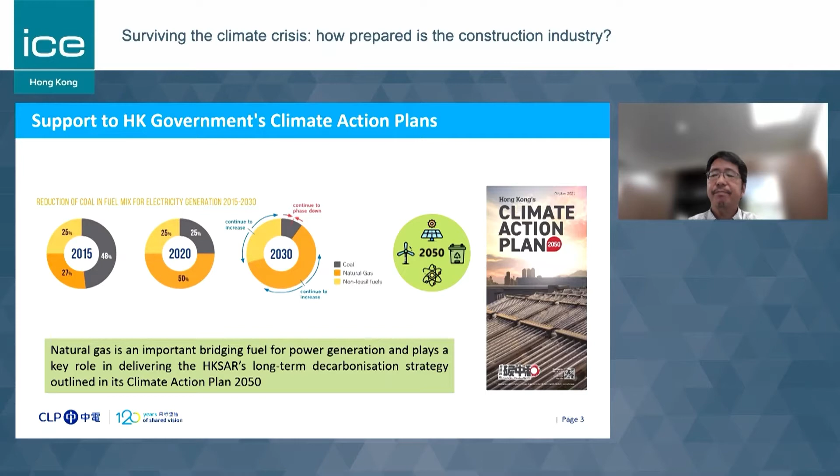If we take a look at how natural gas started being used in Hong Kong, this all started back around 1996 or thereabouts, when we first introduced the really long offshore pipeline from the gas field in Hainan, which is about 800 kilometers away. That was the first ever long-distance pipeline directly supplying natural gas to Hong Kong's CLP power station.

Ten years or so later, there was the introduction of natural gas from Dapeng, Shenzhen, to the Hong Kong Electric facilities. And the last to add to the portfolio was the big initiative from the mainland, the West-East pipeline gas. Probably not a lot of people in Hong Kong know that we actually benefited from this with a branch, taking gas by building a pipeline from DaChan Island to the CLP power plant. So there are currently three sources of natural gas supply to Hong Kong. But we do need to broaden the portfolio if we were to completely replace the use of coal, and this is where our project comes in.

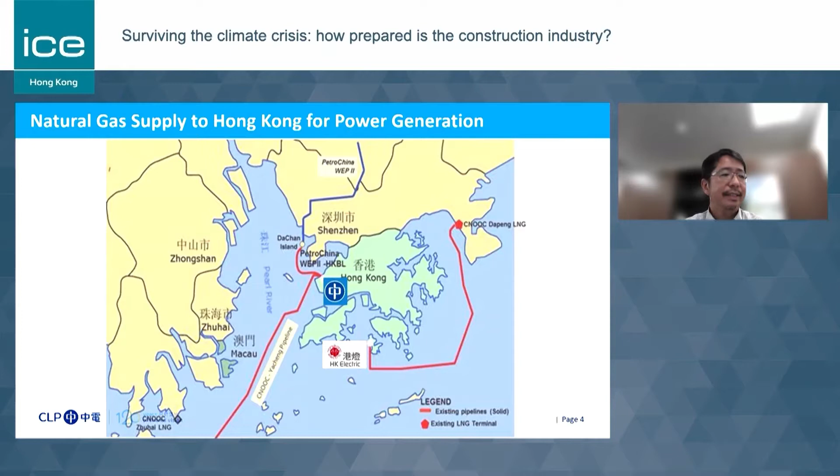So rather than pursue a similar long-distance pipeline, we turned to another form to add to the portfolio: what we call liquefied natural gas. This basically is turning natural gas into liquid form by cooling. The benefit of cooling is that it greatly reduces the volume, making it much more economic to transport over long distances. The liquid itself is colorless, odorless, and non-toxic. Transporting it in a liquid state started back in the late 50s, I think, and ever since there's been a gradual increase in this form of transportation of natural gas.

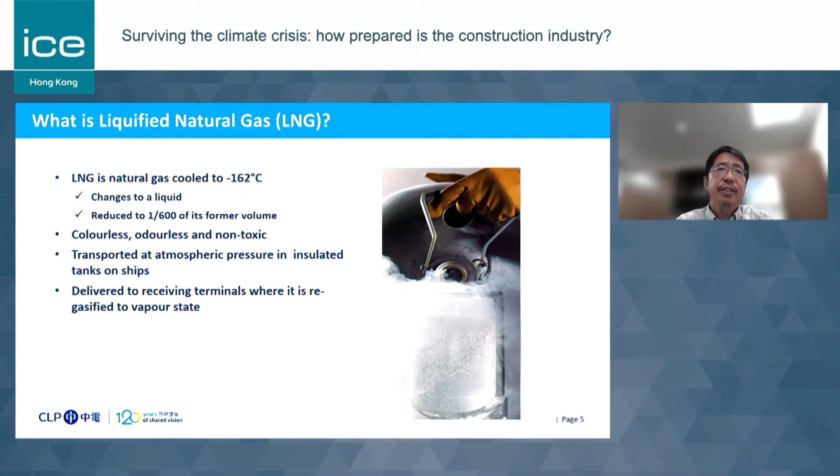In terms of the supply chain, this is quite simple. From the gas field, it gets liquefied and becomes much smaller in volume to transport. These are transported in the LNG carrier to a destination where the liquid form can be transferred into storage locally where the facility is. In our case, this facility is an offshore terminal using a special form of vessel to store the liquefied natural gas before using a local pipeline to transport it to the power station. So it's quite a simple supply chain.

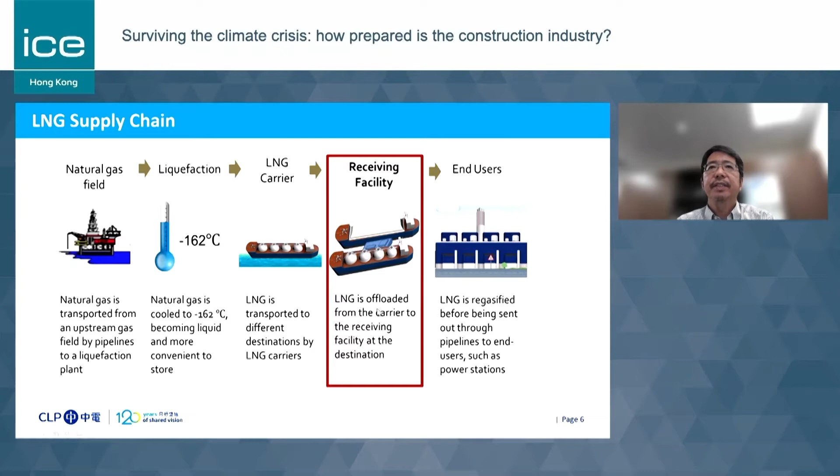And this is the facility that we are currently building in Hong Kong. It is a jetty that allows the LNG carrier to berth on one side, and the storage vessels that we're going to bring in will berth on the other side to store the LNG and let the LNG carrier leave after it is stored.

So there are many long-term benefits from a facility like that. We will be able to access more competitive supply globally, particularly in times when there is volatility in the supply and the prices, and to be able to have more flexibility is very important.

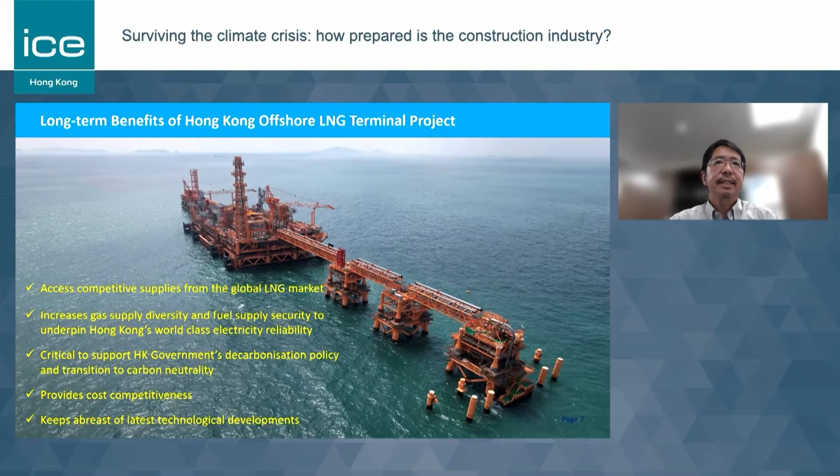And this is going to be a key part in the overall decarbonization plan. At the same time, we will be keeping abreast of technology developments and looking to enhance future greener forms, like Mr. Wong has alluded to, on hydrogen etc. So all this development is part of the journey of where we're trying to get to.

This is the picture of what it's going to be like when the LNG carrier arrives at the jetty, transferring the LNG across to the storage unit. And this is a particular form of storage unit. Unlike many land terminals where you're using purpose-built tanks, this is a vessel with a large storage capacity, storing the LNG and using it as needed.

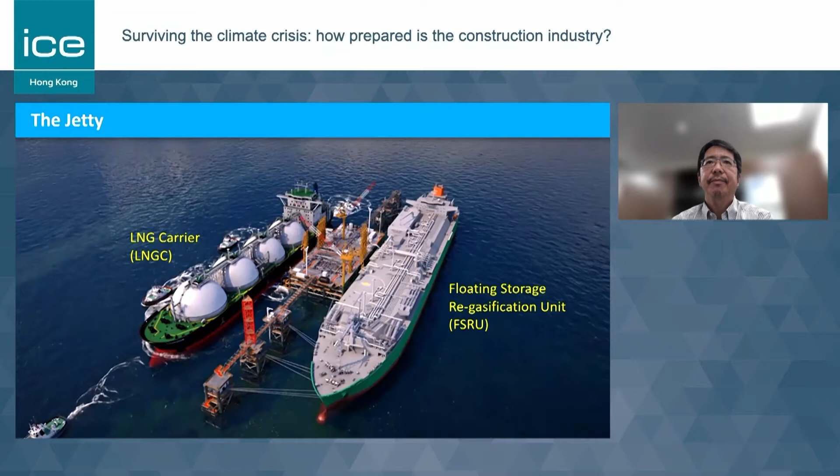So this is what you will see shortly in the offshore environment. This is the vessel that I talked about for storing the LNG locally. It is the exact vessel that we're going to have on a charter arrangement. At the moment it's called the Challenger, but I suspect that the name might be changed to tally more with a local kind of initiative.

The vessel is big. We're talking about an overall length close to 350 meters, which means it's more than the length of 3 full-size football pitches, if you can imagine the kind of size we're talking about. This is important because it means we wouldn't need very frequent visits of the LNG cargo to Hong Kong, making it more manageable.

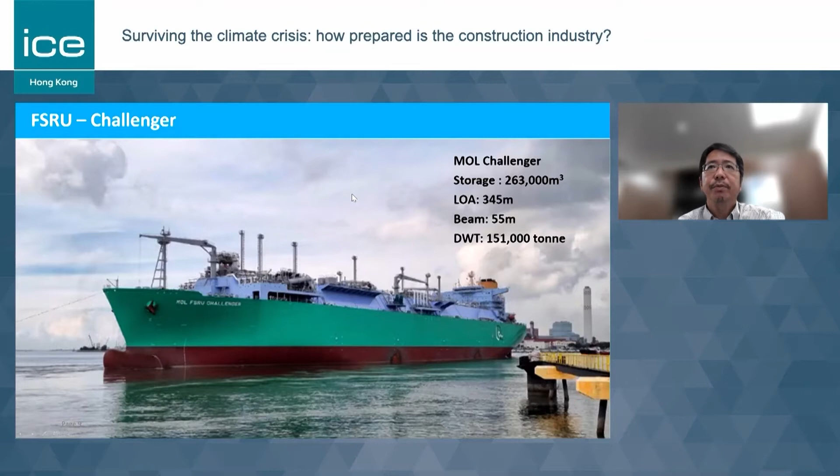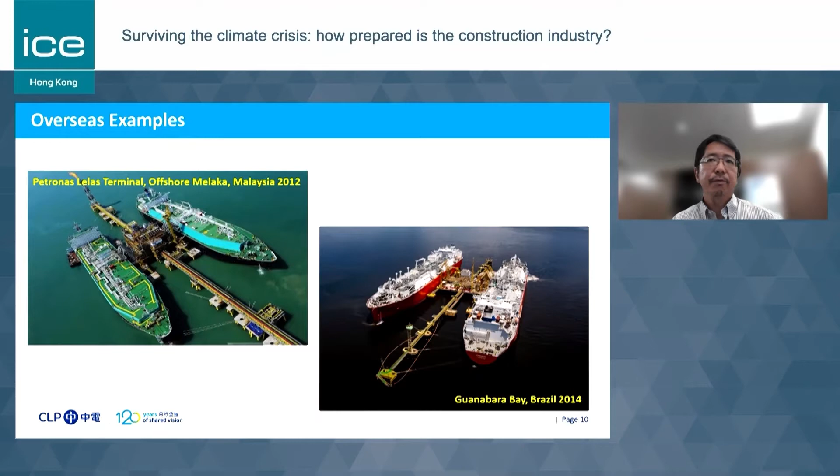Once the LNG is stored, it's transferred to the power stations using two local pipelines. One is about 18 kilometers long, going to Lamma Power Station. The other is much longer, about 45 kilometers, all the way to Black Point Power Station. That's the configuration of the facility we are building.

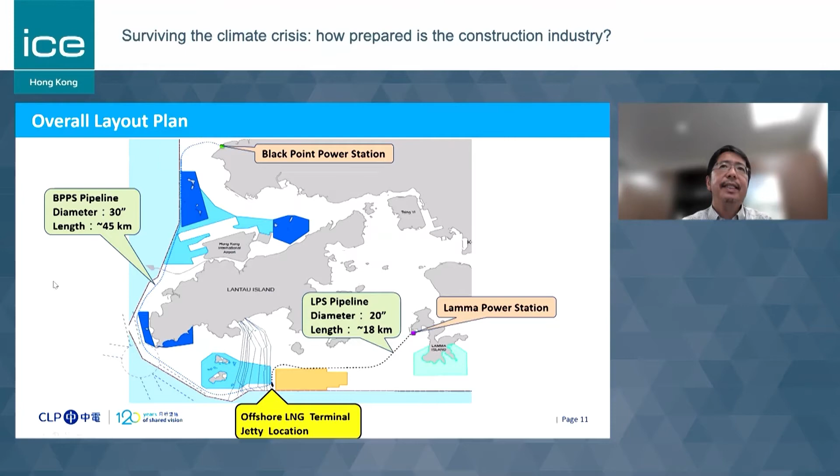The initiative comes from a joint effort between two companies, Hong Kong Electric and CAPCO or CLP, forming a joint venture company called Hong Kong LNG Terminal Limited. The contract is currently ongoing.

We have engaged a very famous offshore unit called COOEC, one of the major players in the offshore oil industry, and the contract started in early 2020. This date is quite important, and I'll come back to that later. Early January 2020 was when the contract was awarded. Construction actually started towards the back end of 2020, about December 2020. That's when the actual physical site construction started.

The scope of work, as I mentioned, included the jetty to build, and the two pipelines we need to build as well. I'll focus primarily on the jetty, as well as the part I know better, which is the Castle Peak or Black Point pipeline that goes to Black Point Power Station.

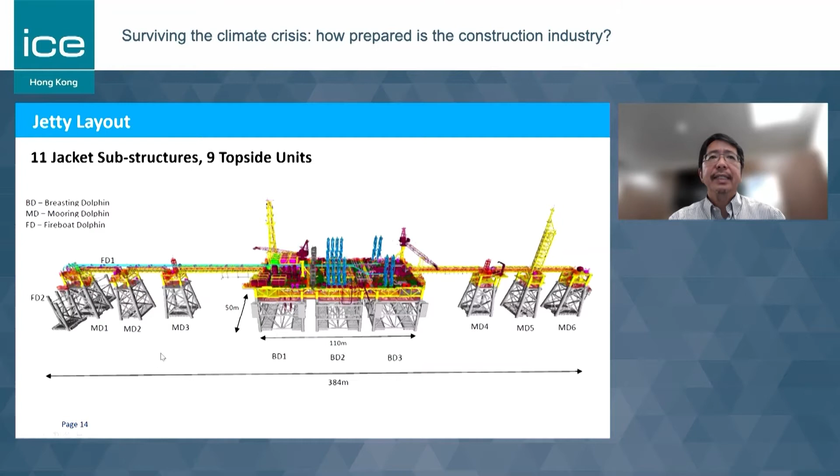So this is approximately how it looks like in reality. And if we take a cross-section look at it, these are in the marine environment. We have about 15 meters-ish of water depth, and typical of an offshore environment, we have a deep layer of marine mud, very soft, followed by an alluvial layer.

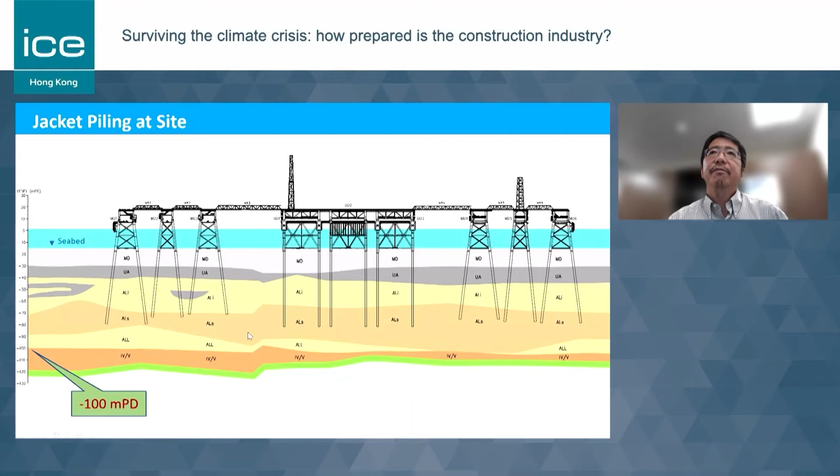This alluvial layer is very thick and increasing in strength with depth. We won't be able to find decomposed rock below until approximately 100 meters below Principal Datum. So these are fairly challenging environments for building a jetty.

I mentioned the important date of January 2020 - the first task we actually faced was COVID-19, which first hit various cities in mainland China. Immediate action included a lot of lockdowns restricting people's movement across different cities. This was a major issue for us because we were about to transfer a large group of expertise from the COOEC flagship yard in Qingdao down to the proposed fabrication yard in Zhuhai.

Without access to people coming from Qingdao, we wouldn't be able to start any fabrication work in Zhuhai. This was very desperate for us because timing was particularly important to get started on the piling works for this job. We only have about half a year to carry out this work, in the second half of the year - this is part of the restriction in the environmental permit to protect the sea mammals in the area.

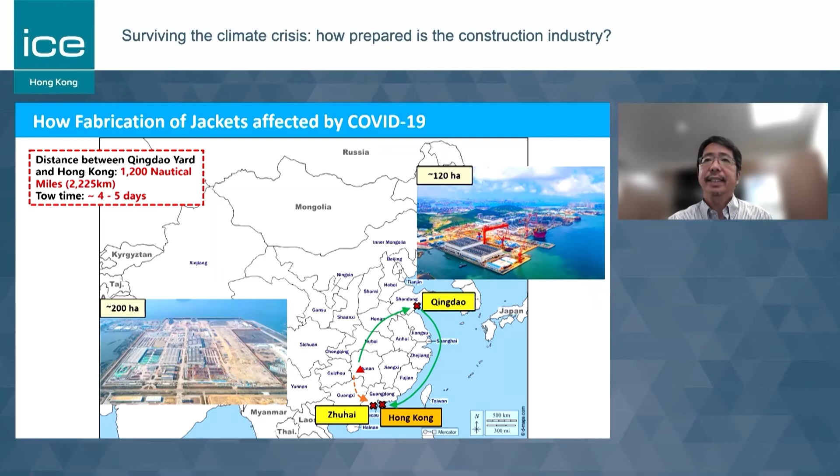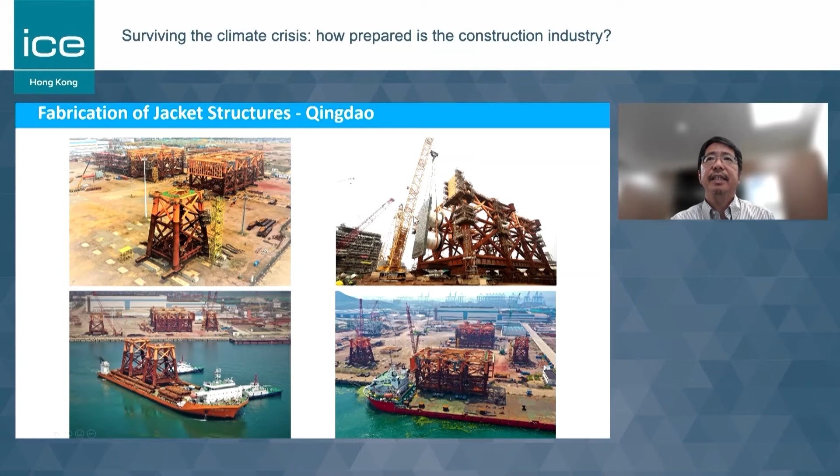There are some pictures of what it looks like in the Qingdao yard - these are the fabrication of the substructure units, what we call the jackets. Fairly major stuff, as you can see. The fender units are also big units.

The change in fabrication location helped us in the first year, 2020, but it also created issues in the subsequent year, 2021, because having those units a lot further north in the territory meant we faced the daunting task of transporting them a long way, right from Qingdao to Hong Kong.

In particular, in the summertime when we have typhoons, I want to share a particular example because it was a pretty agonizing time. We were ready to transport the units down from Qingdao, and we were alerted to the prospect of a typhoon coming. That's not too bad, we can usually time it to allow the transportation vessels to avoid the typhoon. But we've learned from experience.

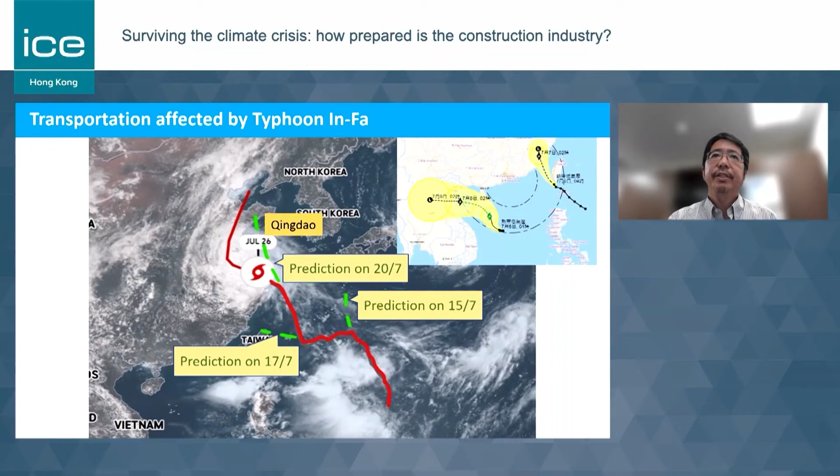Transportation expertise teaches you to never completely trust the early forecasts. This is a good example, because as you can see in the green dotted line, the forecast actually changed quite a few times in very different directions. If we had used the early prediction, we would have been in serious trouble. So that puts a lot of emphasis on experience in marine works for planning transportation. These are very important aspects we need to be equipped with if we're serious about offshore works.

Finally, these jacket units arrived in Hong Kong, and we had big lifting vessels to carry out the work. This is the first big lifting vessel that we brought to Hong Kong. This particular one is called Lanjing.

Lanjiang, my beg your pardon - this is Lanjiang, the first one. It has a lifting capacity of about 3,800 tons. It's a very versatile vessel - it can do pipe laying, it can do heavy lifting, and it's stable as a rock even in fairly hostile environments. So a very good working vessel, and we were pleased to have been able to get hold of this.

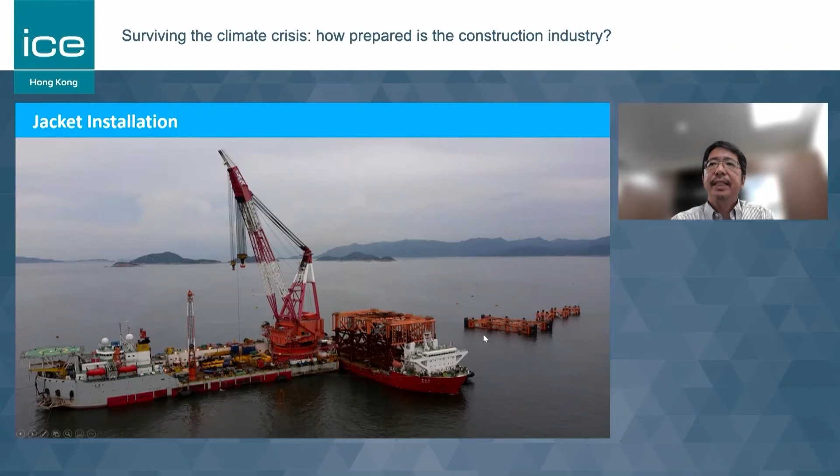This will involve timing the weather window, getting ready, lifting the unit, placing them in place, and then carrying out the piling works to secure the jackets.

So in sequence, this is the lifting process. For those of you with sharp eyes, you'll see that at the bottom end of the jacket there are some fairly flat plates, which allow the jacket to be stable on the seabed temporarily before we insert the piles to secure it completely. That's how it worked in a temporary manner.

Having placed it on the seabed, we start pitching the piles - very long piles. This particular unit has raking piles. At the far end, if you look at the picture, this is a video - I hope you can see it. The driving using the 80-ton hammer is very efficient, although these are very big piles. We're talking about a diameter of about 1.8 meters, which you wouldn't use much in a land situation, but it's fairly efficient in the offshore environment, and that's what we typically use offshore.

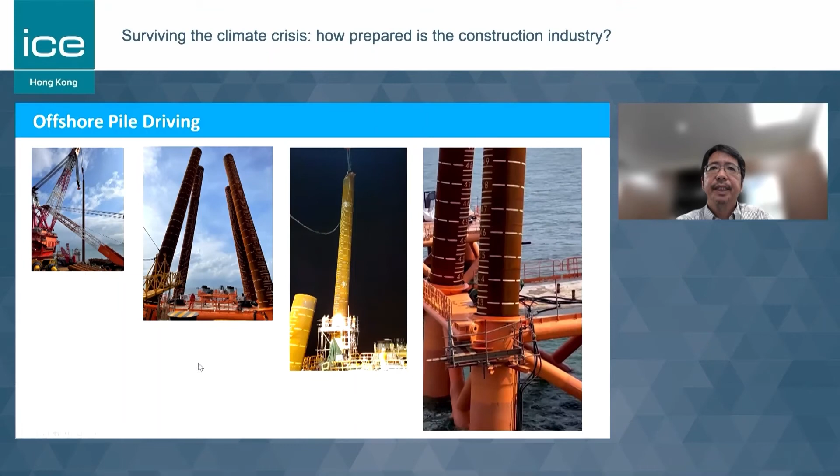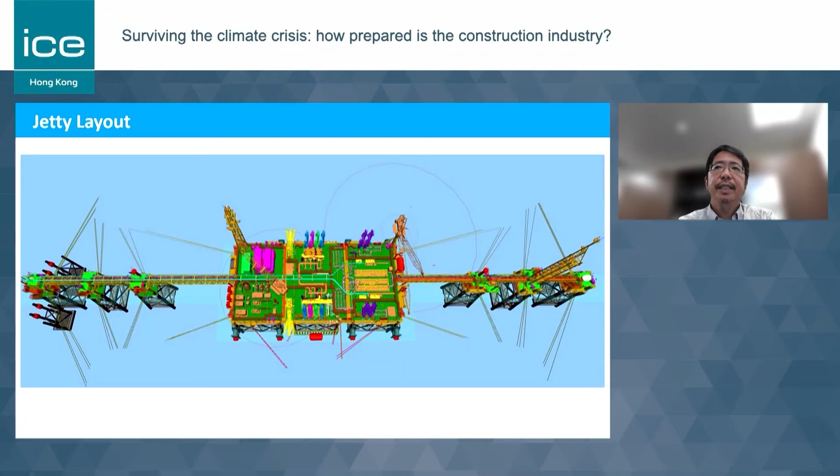Okay, just turning your attention to what it looks like - if we look from a high altitude down, you'll see lots of equipment, like the equipment that facilitates metering. There's a fire safety installation, all the pipes, the generators, some nitrogen gas, and the pigging facilities for the pipes, etc. So all this is equipment that goes on top of the jetty.

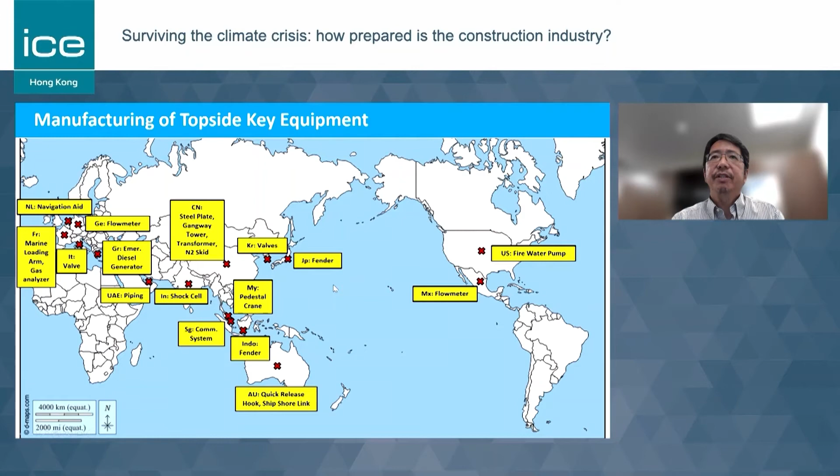There's not a lot of experience in building this sort of facility, and all the equipment comes from different places all over the world, so procurement is a very difficult exercise. On top of that, we also had the difficulty of managing procurement and production of all this equipment at a time when the virus was affecting different places to various degrees. It's been an extremely challenging exercise to make sure all this equipment was produced in good time, not to mention the very strained marine transportation of these to Hong Kong - a fairly crucial piece of the exercise.

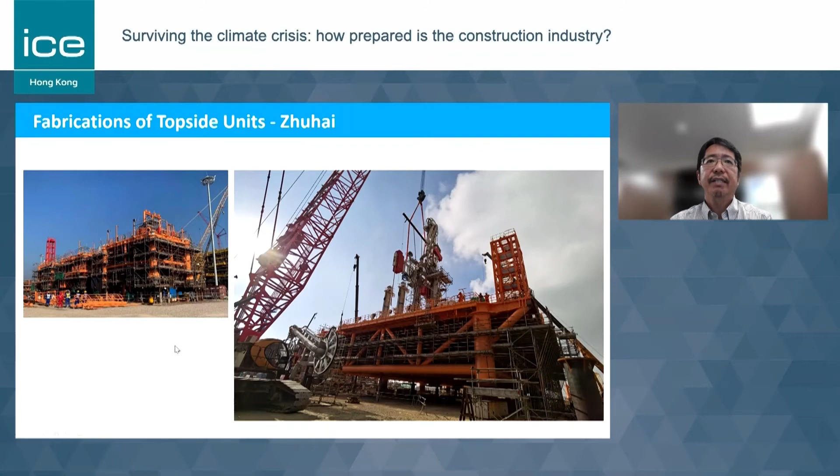So these are the topside units. This happened at the time when we had already got the restrictions lifted in terms of people movement within mainland China. So we were able to actually get all the expertise down to Zhuhai and start fabricating these topside units at Zhuhai, where we originally planned. So that was quite a relief, because these are much bigger units compared with the jackets, and it would have been quite a difficult exercise to move this fabrication to Qingdao if we had to.

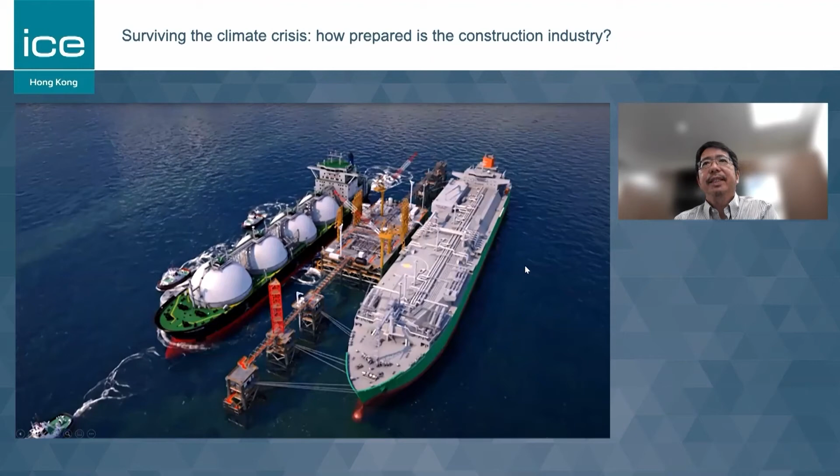Okay, quickly turning the attention to the pipeline. You may have seen this before, but I'm just going to mention in particular the CLP, the Capco pipeline, which is the 45-kilometer long one. There are actually lots of constraints for this pipeline, and I would probably say this is one of the most difficult pipelines that one would ever encounter. These are the kind of constraints that we have to work to.

Just want to quickly point out that there is the heavy traffic in the Urmston Road. We have to deal with shallow water, which usually is good, but too shallow is actually a lot of difficulty. We have to go through several marine parks or go adjacent to several marine parks, which has a lot of restrictions. And we have to go underneath the Hong Kong-Zhuhai-Macau Bridge. We go quite close to the local community of Tai O. There is the complex traffic separation scheme for the marine traffic.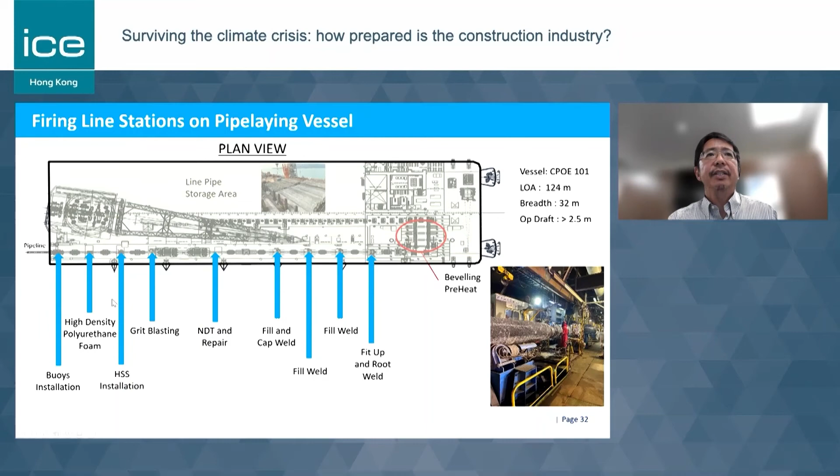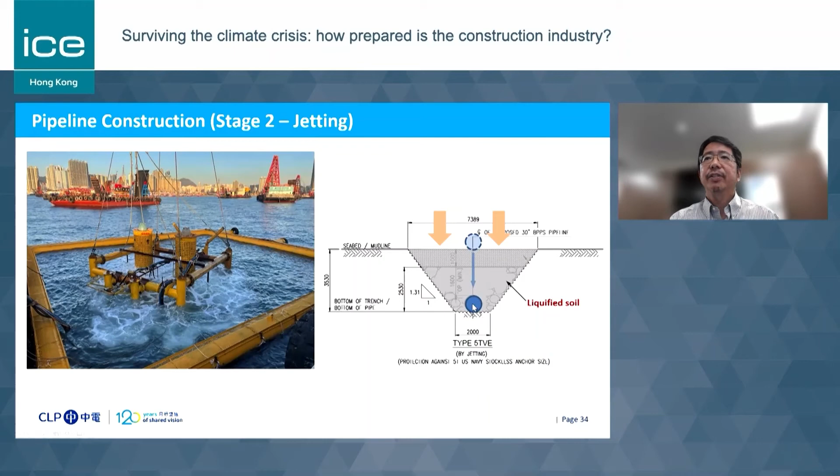And these are the different processes that we have to get through in order to actually lay it on the seabed. After laying it on the seabed, we have to set it to a certain depth such that it doesn't get damaged by the various marine activity. And to do that, what we usually do is use high pressure jetting to disturb the mud, kind of like liquefying it, such that the weight of the pipe will help in getting it into the right position. So we might have to do several rounds of this jetting in order to actually allow it to settle into the right position.

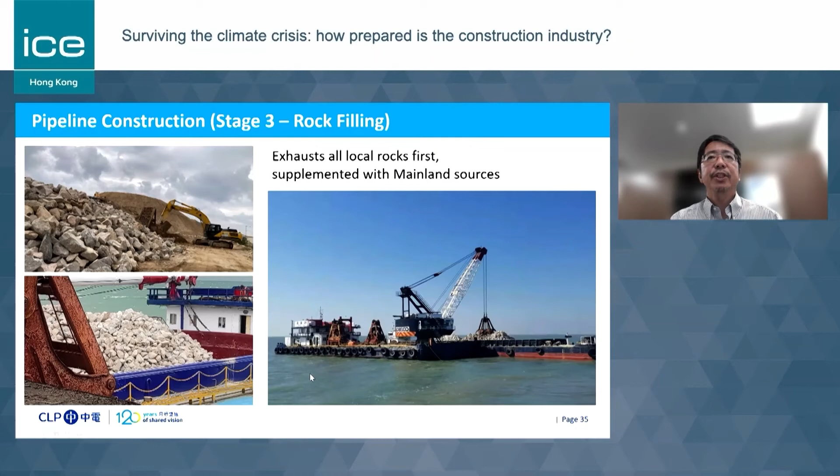After this, we do need to further protect the pipeline by placing rock pieces as a protection to the pipeline. So these are the three processes that we have to do in order to secure the pipeline.

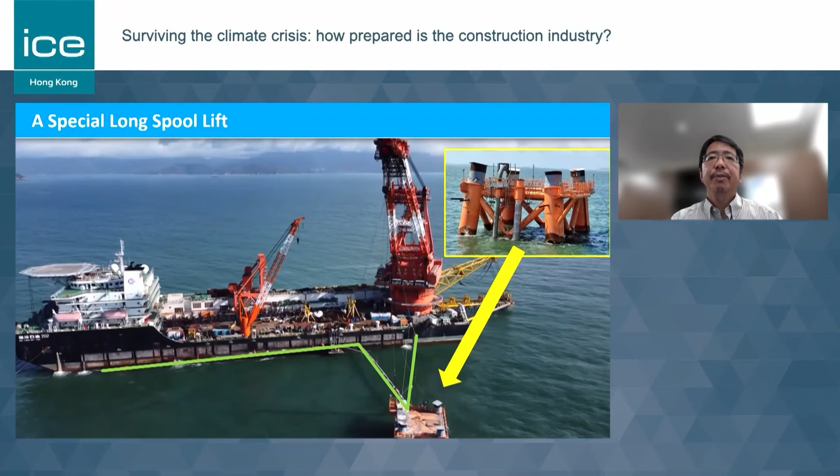Just want to mention this particular lifting, which is an extremely difficult exercise that we have to carry out, and usually lifting is concerned with weight. But here, the difficulty lies in the fact that in our lifting unit, the center of gravity is actually outside the unit, somewhere out here, making the lifting need one of the most extreme skill sets in order to actually put that in position. I thought I will just mention this.

Okay, now we come to the third part. Apologies for seemingly rushing it a bit, because I do want to get through to this part, which is one that I really want to get through to the audience, and that is, from this particular project, we do learn a lot, particularly in the offshore environment, and it's something that Hong Kong has not got a great deal of experience and expertise in. But if we were to be doing more of not exactly the same, but similar projects in the offshore environment, we do need to beef up in many different aspects.

And I've listed a few here: legislation, design, construction, how we need to join up with the marine industry, which at the moment is a very, very separate entity, and how we need to up our game in terms of technology and so on. And I will just illustrate these with a few examples. The first one is navigation safety.

In order to be assured that we are safe in all the navigation activity, we have to do simulations beforehand. And our particular job needed one of the most high end facilities to be able to model the things that we are trying to model. And we tried it in the only facility in Hong Kong, but we couldn't get it to work. So we had to go to the UK. This one is in Wallingford.

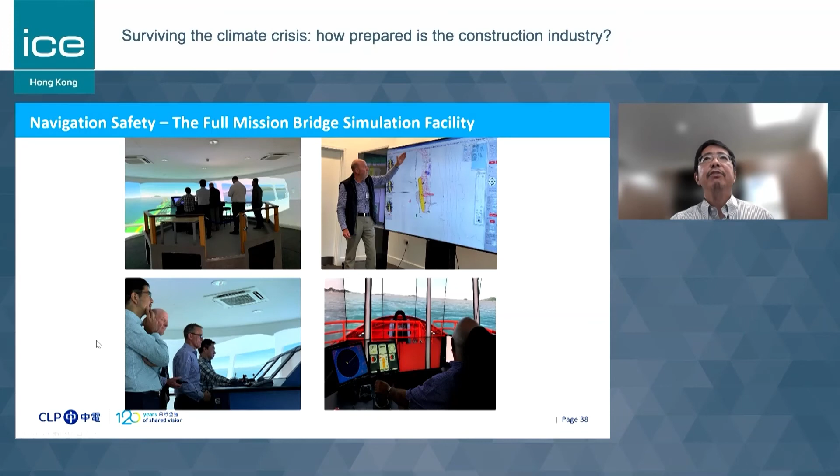Now, this is one of the examples of how we bring the future massive vessels into position. Bearing in mind that we have to avoid the dumping ground and we have to avoid getting into the future marine park. And so you will see how the tug master, under the direction of the pilot, maneuvers the 4 tugboats in a very skillful manner, turning it around.

Just a gentle reminder of the time. Thank you. Yes. Sorry to disturb. Thank you.

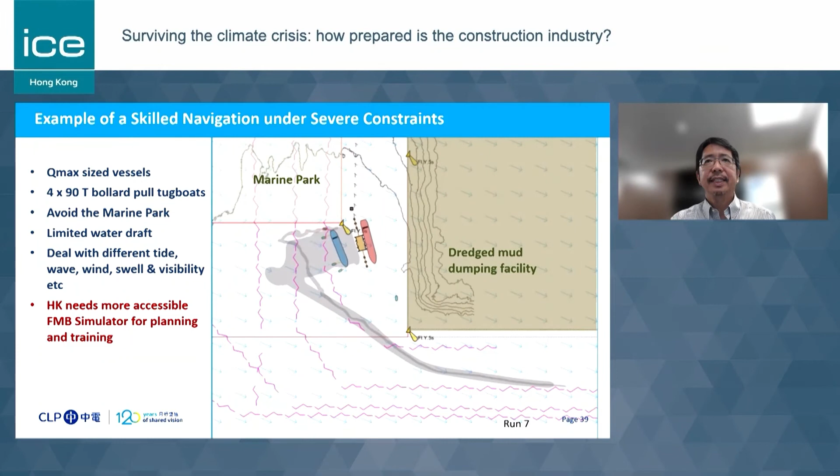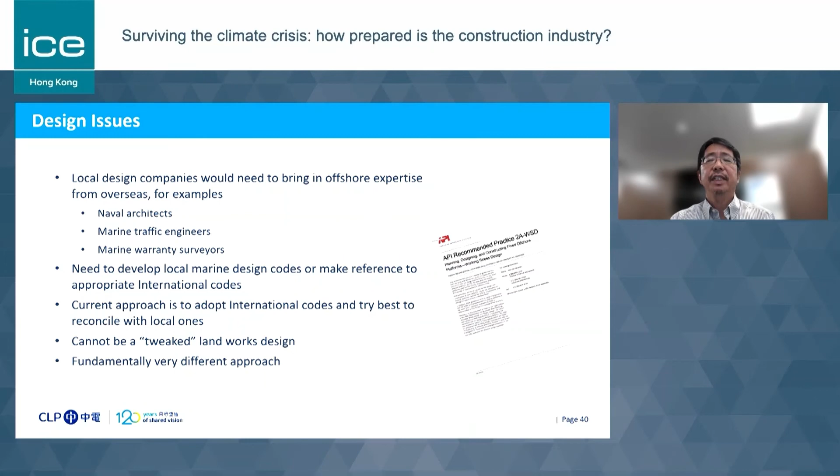So this is how we maneuver the vessels into position. Design codes: we basically are not really there in terms of design codes to cope with the offshore environment. So a lot of it needs to use international codes and so on.

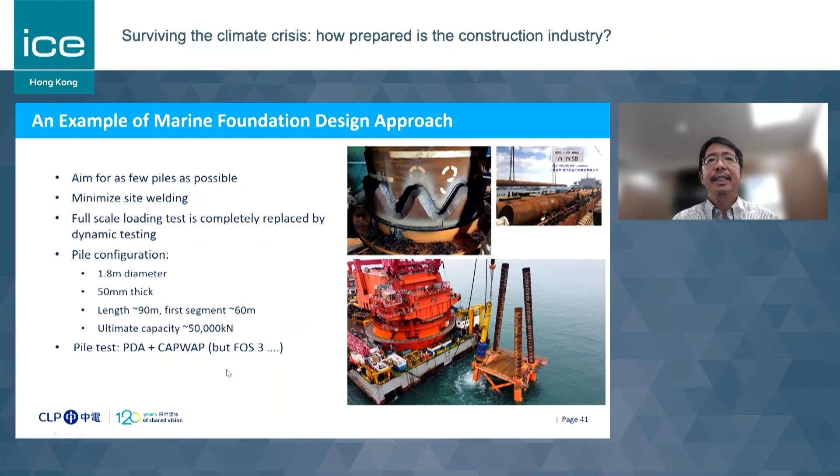And this is an example where, for the piling works, we use fairly big diameter piles. The length of the pile, even the first segment, is about 60 meters, which we don't normally use in Hong Kong. And the driving manner and the testing manner also are not something that we see very often in Hong Kong.

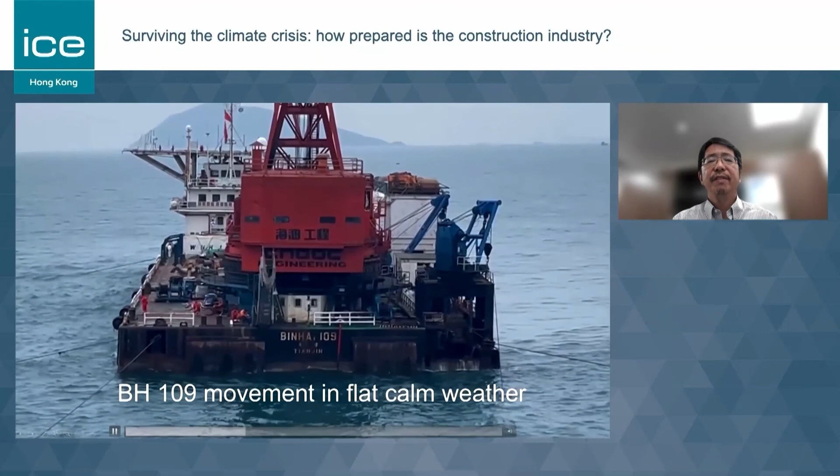Okay, so coping with the marine environment, these are the long wavelength or long period swells that we have to deal with. So not something that we are very used to in Hong Kong.

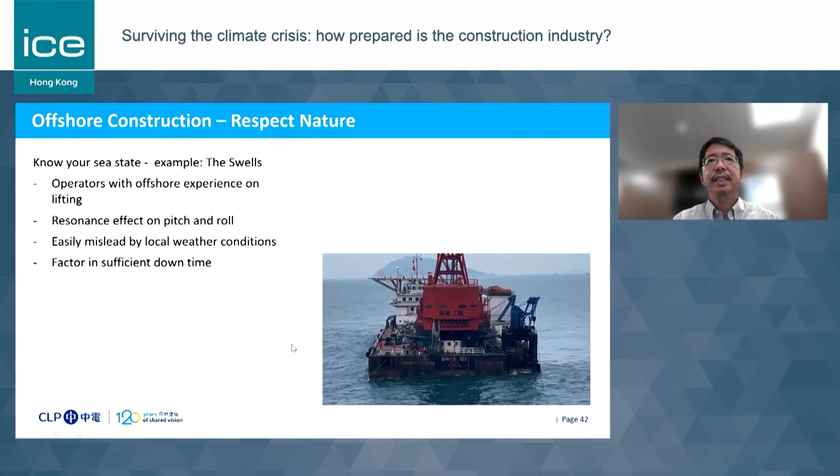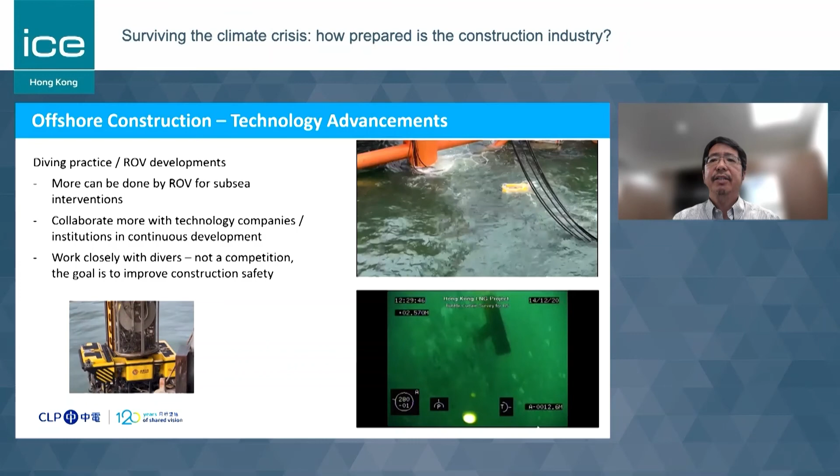Technology: we have to use a lot of ROVs, the remotely operated vehicles, and I probably won't dwell on this, but developing technology is vital to keeping abreast with the offshore industry.

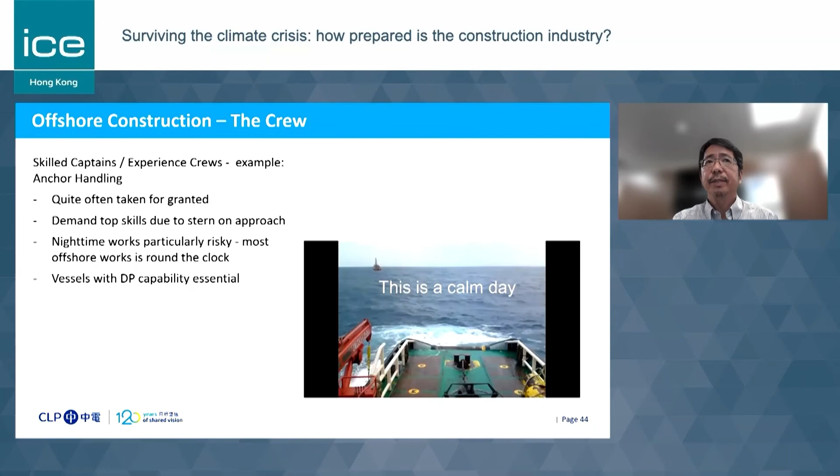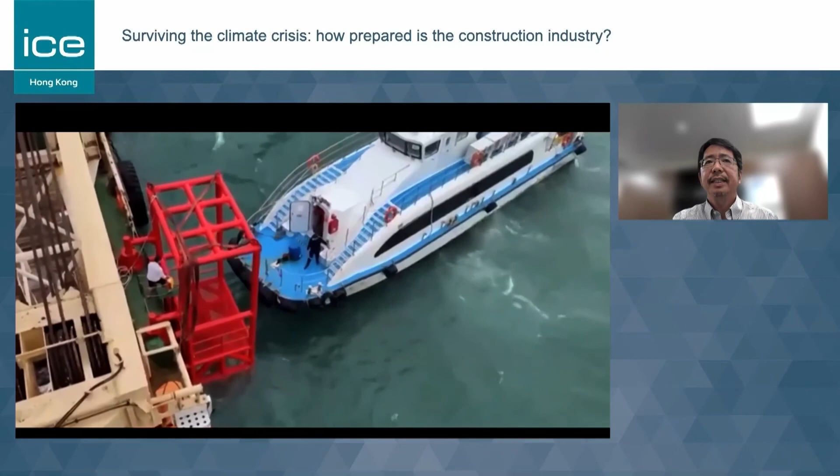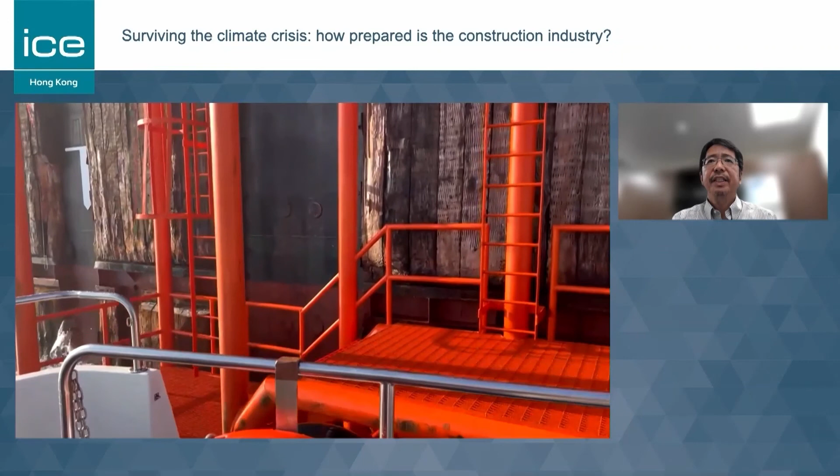Anchor handling tugs. This is very much the experience of people in the offshore industry, and there's a lot of safety consideration that we have to take into account in order to be ready, getting people onto the transfer in a safe manner. These are things that we need to prepare ourselves for. And we are also not used to this in Hong Kong. So on safety in the offshore industry, there's a lot to learn from their experience.

This is another example of how the offshore industry transfers people. And there's a lot of training in order to get fairly well practiced access to the different vessels.

This is probably my last slide, or the second last slide. In order to be able to safely conduct works, one of the key aspects is to stay out in the sea as long as we can without frequent transportation back to shore. So these vessels are equipped with various facilities to allow people to stay on board. Now, this is another thing that the Hong Kong industry is not quite prepared for. Many of us still prefer to go home after every day, but in the offshore, this is quite against safe operation in construction.

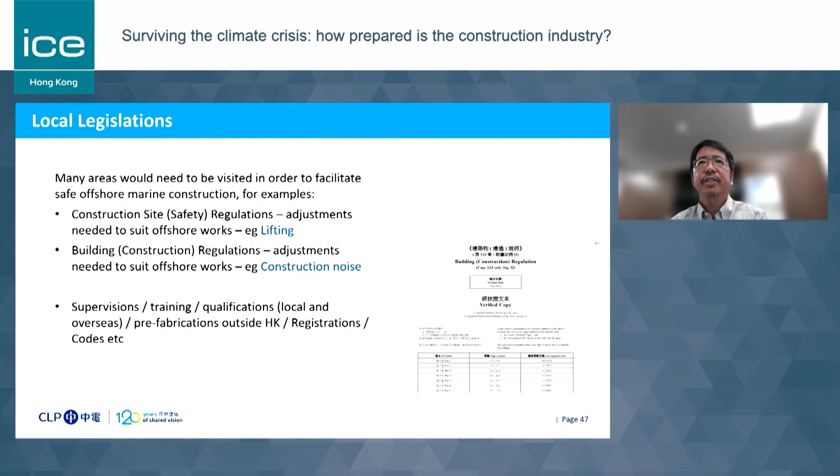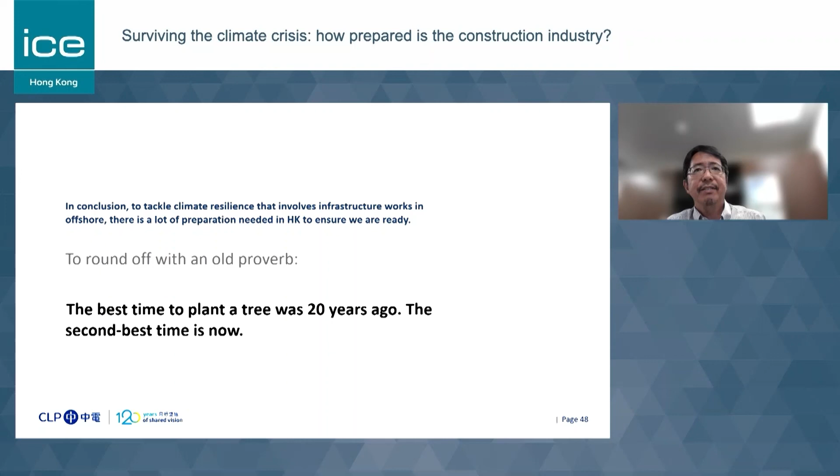Okay, so in essence, in terms of tackling climate resilience, if we have in mind other infrastructure works in the offshore environment, we do need to prepare ourselves to be better equipped in tackling this kind of offshore construction in our civil engineering remit. So to finish off with an old proverb: the best time to plant a tree was 20 years ago, but the second best time is now. So this is all I want to share.

Thank you very much. Thanks a lot, Dr. Lee, for your very detailed and enlightening presentation. We have learned a lot. Decarbonizing power generation for high-density cities like Hong Kong is very crucial to achieving carbon neutrality. And clearly, CLP has done a lot. So thanks for the sharing today.

Because of the time limit, we probably only have time for one question. We have received a few. Let me read the question for Dr. Lee. The question is, how resilient is our undersea supply pipeline and offshore terminal under extreme weather conditions? As we know, Hong Kong receives a number of extreme weather conditions every year. So could you educate us on this question, please?

Okay, thank you very much. It's a very good question, and that's exactly what we had in mind in developing this terminal, because as I mentioned earlier, we relied on the direct pipeline from the source into Hong Kong. We do feel a bit vulnerable, because there was one event many years ago where weather conditions caused a landslide. The landslide damaged one of the pipelines bringing gas to Hong Kong, and that caused quite a disruption. We had to frantically seek alternative fuel to maintain the high efficiency that we had in Hong Kong.